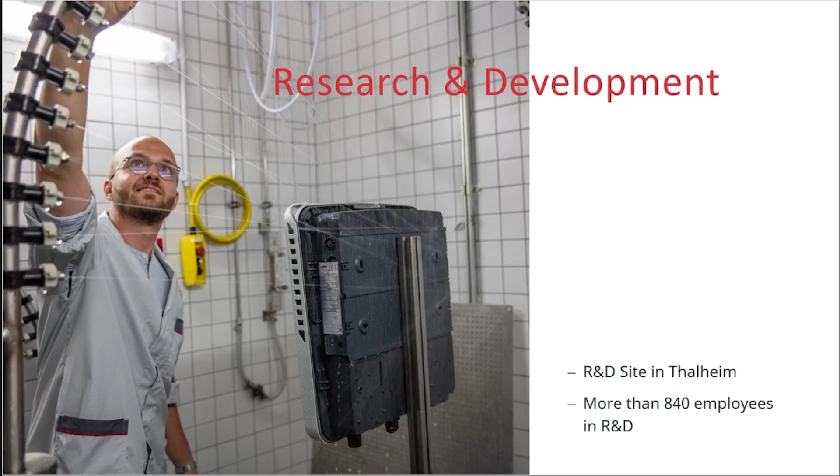Manufacturing is also in Sattledt, all villages near Wels, maybe 10 kilometers away. Pettenbach also makes torches, that was the start from Günter Fronius at the old location, which is still working now. Then there was rebuilding in Sattledt and Wels, and Sattledt is the manufacturing site, with final assembly in Sattledt, and welding torches in Pettenbach.

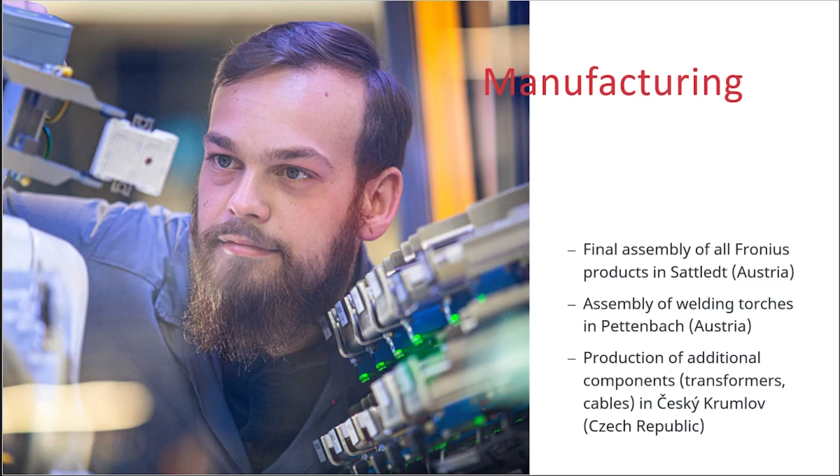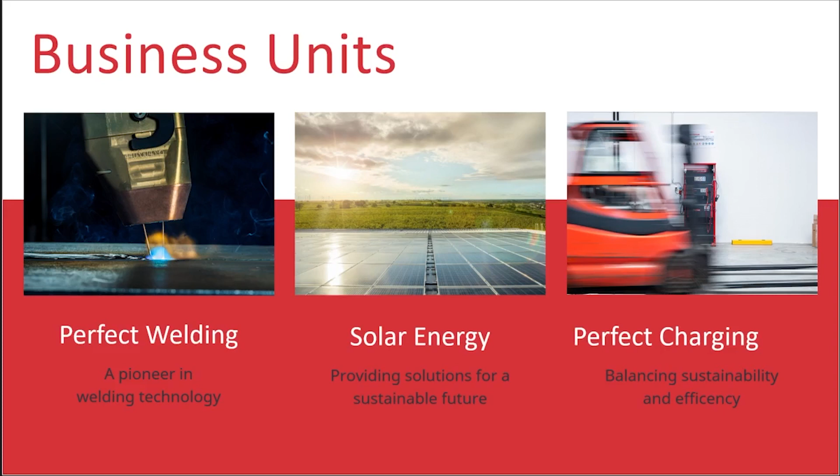And the production of transformers and cables is in Czech Republic. We have 3 business units: perfect welding, solar energy, and perfect charging. We're a pioneer in perfect welding and solar, providing solutions for a sustainable future, and charging balances sustainability and efficiency.

Perfect charging, founded in Pettenbach in 1945, providing smart and best-in TCO, total cost of ownership.

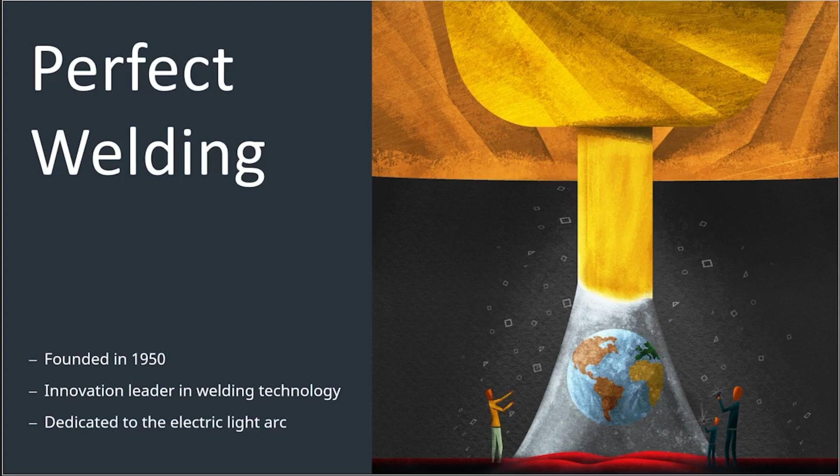Perfect welding, founded in 1950, innovation leader in welding technology. Solar energy, founded in 1992, making 24 hours of sun, really.

Fronius' mission is also about the people, the planet, and the profit.

For the perfect welding unit, we have a short video, this is the newest one. This video shows some parts of what we are welding for customers, including automotive customers.

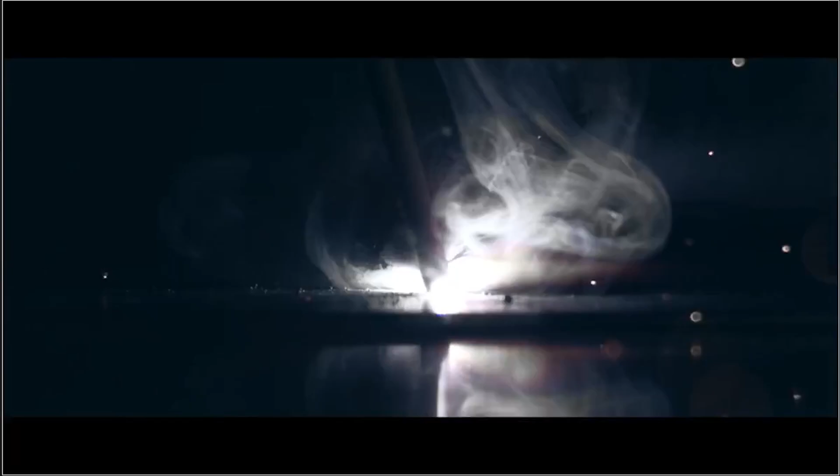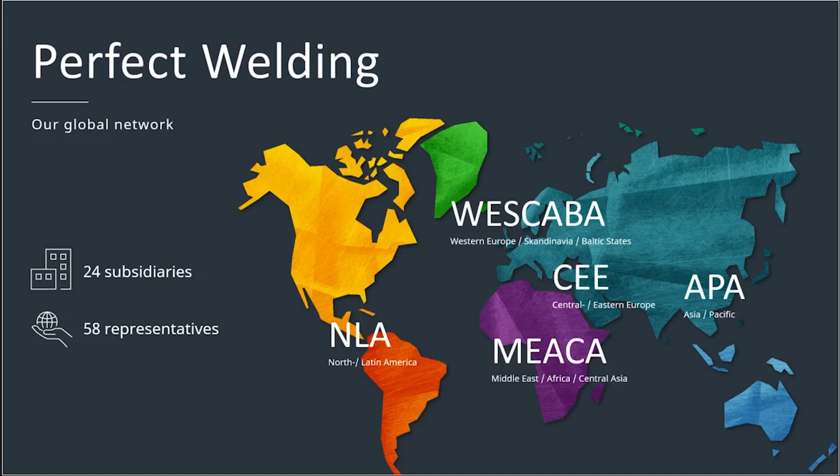Then we have our global network. We have 24 subsidiaries, 58 representatives, across North and Latin America, the Middle East, Western Europe, Eastern Europe, and on the Pacific side, the Asian side. WESCABA, Western Europe, Scandinavia, Baltic states.

We have almost 7 subsidiaries, 11 representatives, and 261 employees there. CEE, Central and Eastern Europe, has 4 subsidiaries, 12 representatives, and 123 employees.

North and Latin America, you see Canada, USA, Mexico, Brazil, Argentina. That's 5 subsidiaries, 8 representatives, and 201 employees.

Asia Pacific: 6 countries including Japan, Hong Kong, Vietnam, Thailand, China, India, with subsidiaries, 11 representatives and 245 employees. Middle East, Africa, Central Asia: 2 countries, Turkey and South Africa, with 16 representatives and 37 employees.

1998 brought the digital revolution with TransPuls Synergic, fully digital controlled. 2001 saw laser hybrid, which is also a high performance welding process. 2004 introduced the CMT process, the dynamic cold metal transfer welding process. Then in 2013, TPS/i, the intelligent system - moving from digital to intelligent, that's what the 'i' stands for.

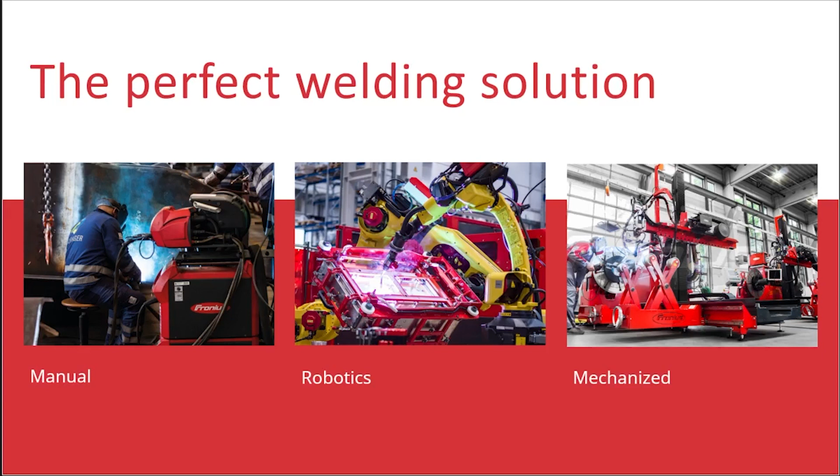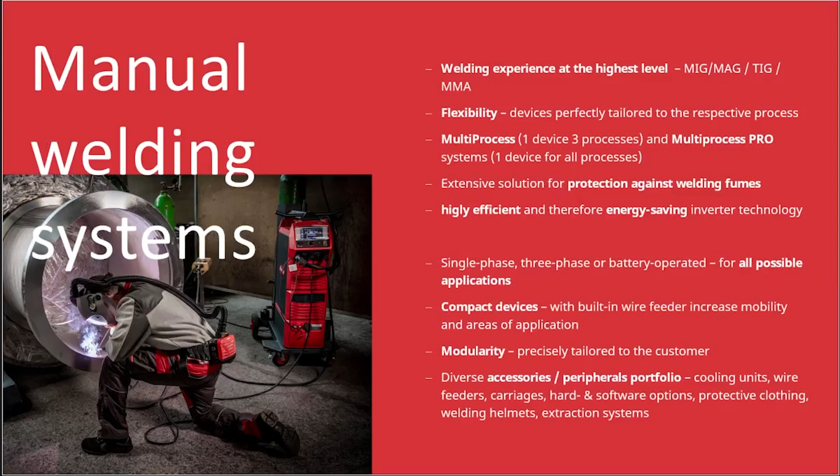With our welding solutions we have manual, robotic and mechanized options, covering MIG-MAG standard pulse CMT, MMA, TIG and TIG plasma. For manual welding systems, we offer experience at the highest level across MIG-MAG, TIG and MMA, with full flexibility.

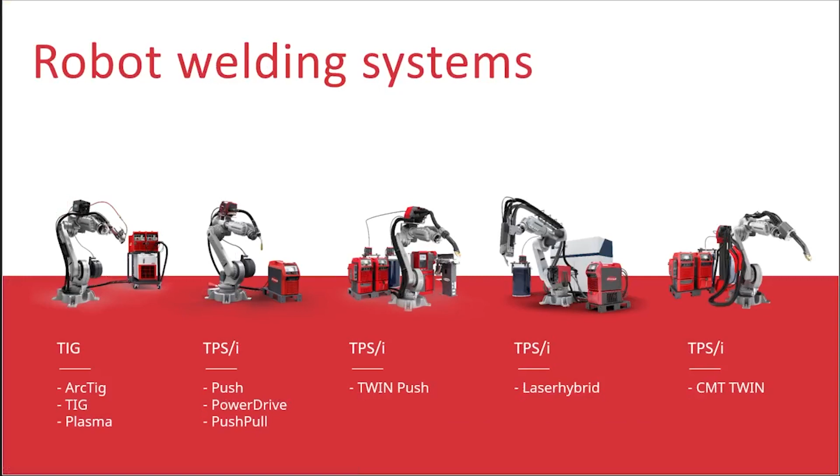On the robot side we have TIG and TPS/i, with different TIG processes like ArcTig and plasma. For TPS/i we have push, power drive and push-pull for the robotic side. We also offer high performance welding with TPS/i twin push, TPS/i laser hybrid, and CMT twin.

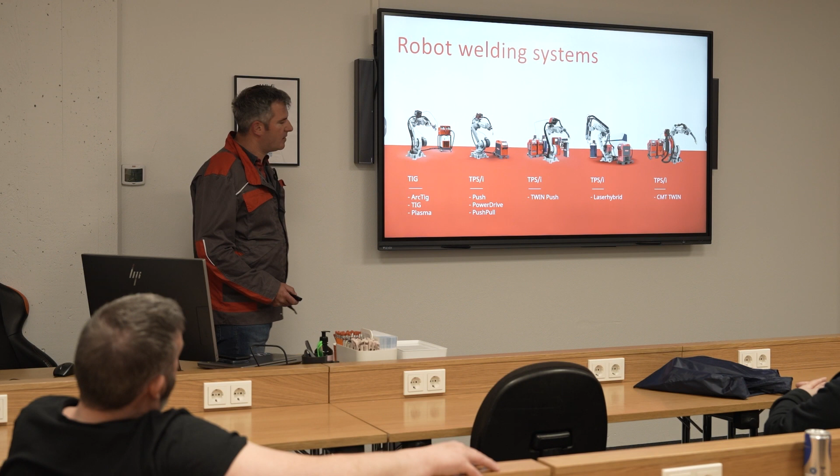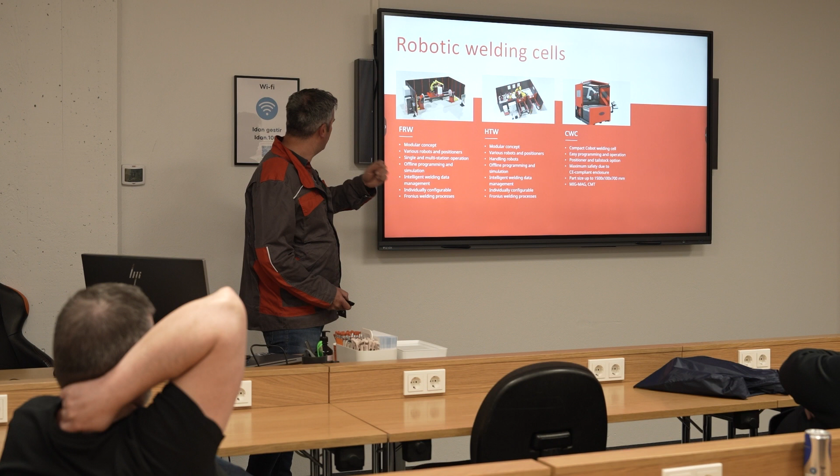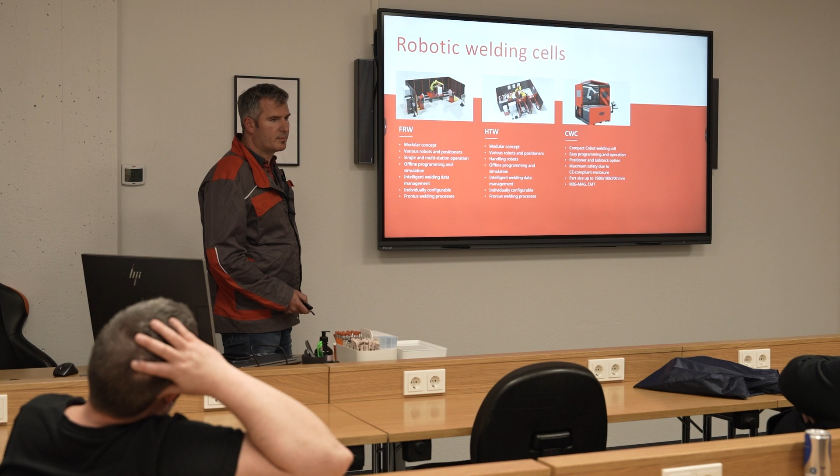We also have automation, the FRW system, complete material handling for welding with handling robots or compact cobot cells. And hard automation including circular welders or seam welders, clamping and bench systems, or circular welding.

Cladding is also possible - we have different cladding systems, including SpeedClad which preheats the wire, allowing you to bring more wire into the process on the cladding side.

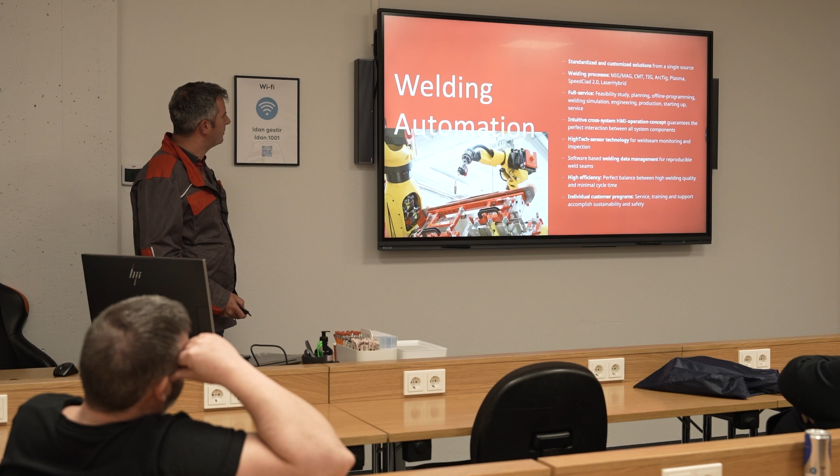Products from the automation side include orbital, carriage, and some components. The target segments for automation include general industry, yellow goods, and automotive, which we also see in the video.

Customer tailored services are also important, for the right data management, WPS, welding training for the future, and also WeldCube software solutions with data interfaces.

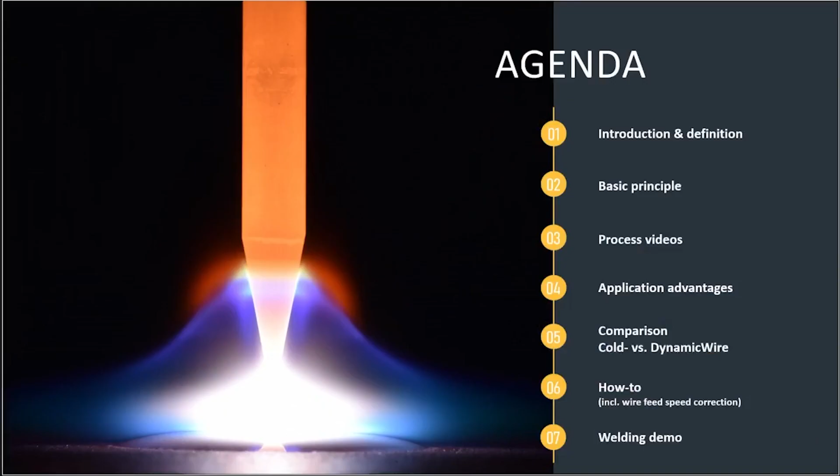The introduction and definition of TIG DynamicWire is based on active control of the wire feed. The actively interacting wire control expands the parameter window and simplifies handling. The wire feed speed is automatically adjusted to the amperage, arc length and seam type.

TIG DynamicWire works in synergic modes. We have all synergic characteristics possible for different materials, also aluminium, nickel base, and steel - that's all synergic modes.

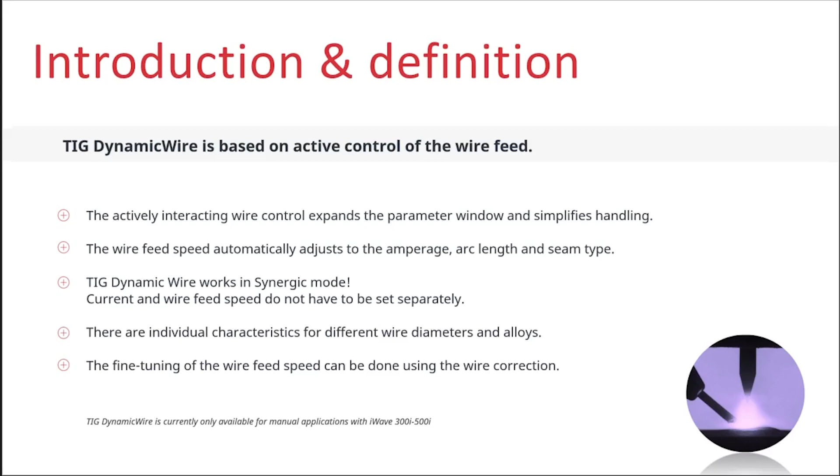There are individual characteristics for different wire diameters and alloys, and fine-tuning of the wire feed speed can be used - we see this on the wire correction parameter, which ranges from -10 to +10. It's the only parameter you need to use.

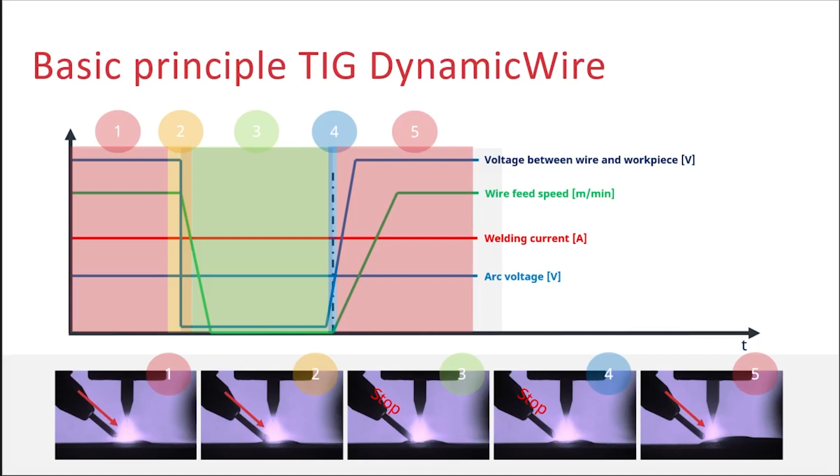Synergic lines, what we have: aluminium, magnesium, aluminium silicium, stainless steel, steel and titanium. And when some customer needs a specialist characteristic, then we made it for the customers.

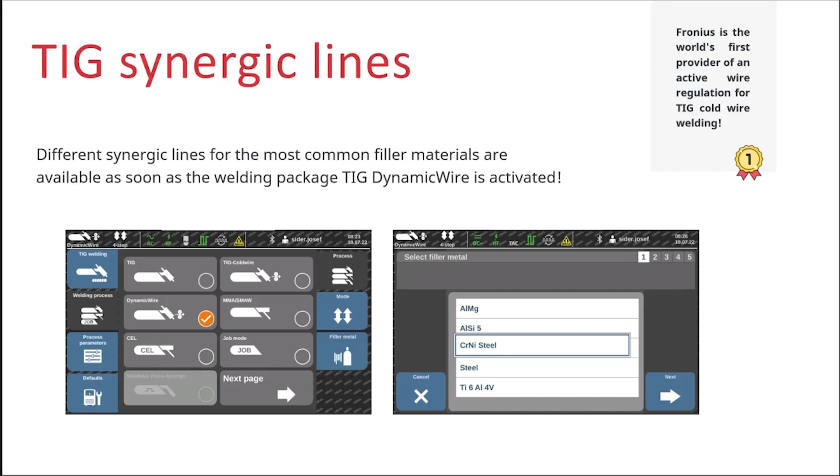Only this button, DynamicWire, the process, use the process, and then use the filler material. It's a picture of how it works. Wire comes, contact, stopping, and waiting to burn. And always feeding, stopping, feeding, stopping.

It's also possible with TIG DynamicWire pulse. And the wire correction is -5 to 0 and to +5. We see it here on the seam, we have here -5, that's meaning we became not so much wire, it's a little flatter. 0 is what we use for the synergic line, and on +5 we have more wire.

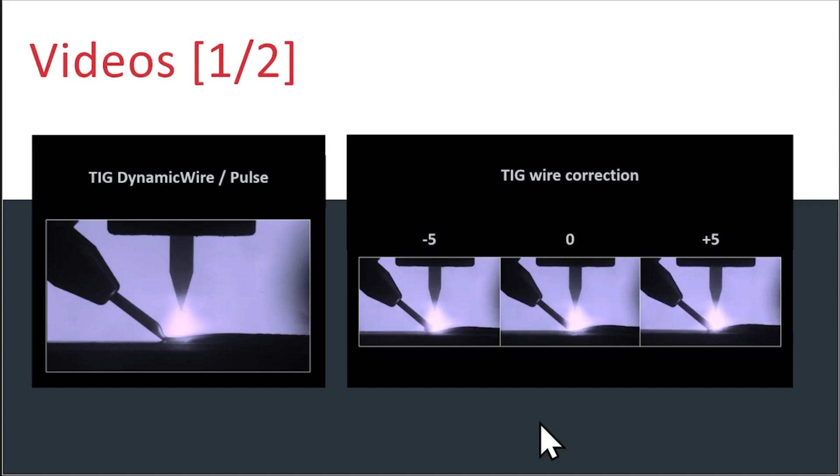On this we see the -5 is meaning less wire and 0 standard, and +5 is you get more wire. Maybe when you have the first pass for the root side, you use -5, and for the next layers, when you want more wire, then you give more wire. This we see, that's a sample, okay, 8 mm.

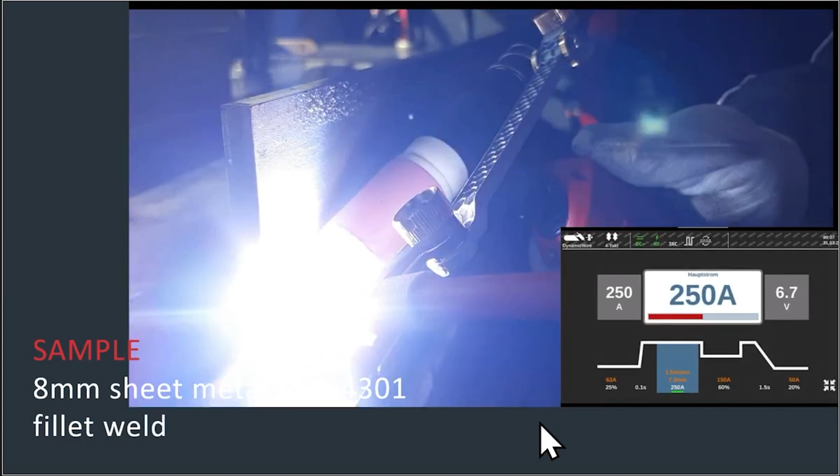Practical advantages from DynamicWire: improved wetting behavior. Excitation of the weld pool helps in case of component tolerances because the feeding regulates amount of filler material when the gap is changing or something. Application specific setups, you have some characteristics available, and it simplifies manual welding as tolerances and changes in arc length.

Wire and current no longer have to be set separately thanks to TIG synergic mode. You have not a lot of parameters, it's easier to handle. When you have some welders with less skills, then it's easier with DynamicWire.

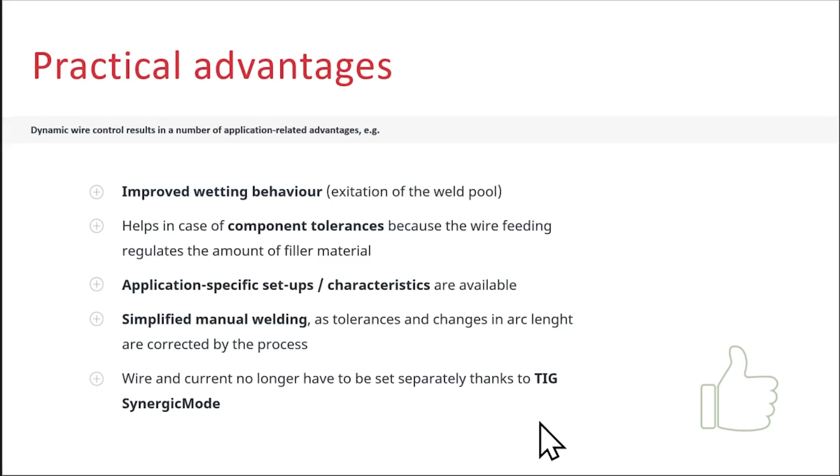Wire control and consequences, you see here some example. We have here beginning 0 gap and here with 4 mm gap. Beginning here, weaving off, and here with weaving on.

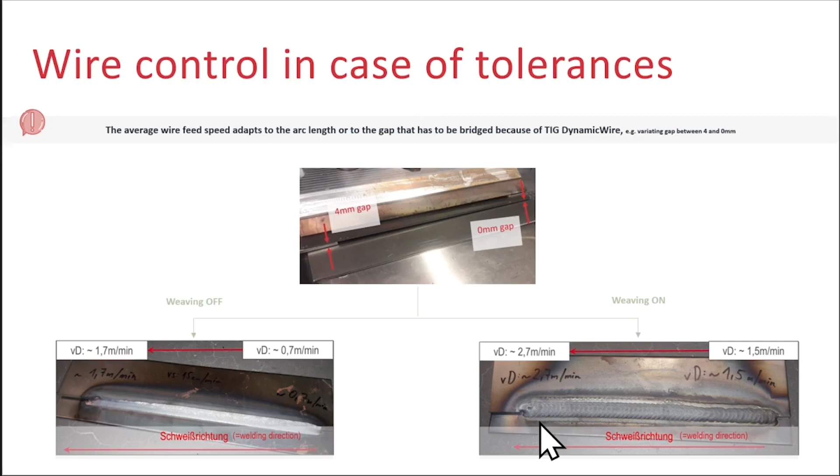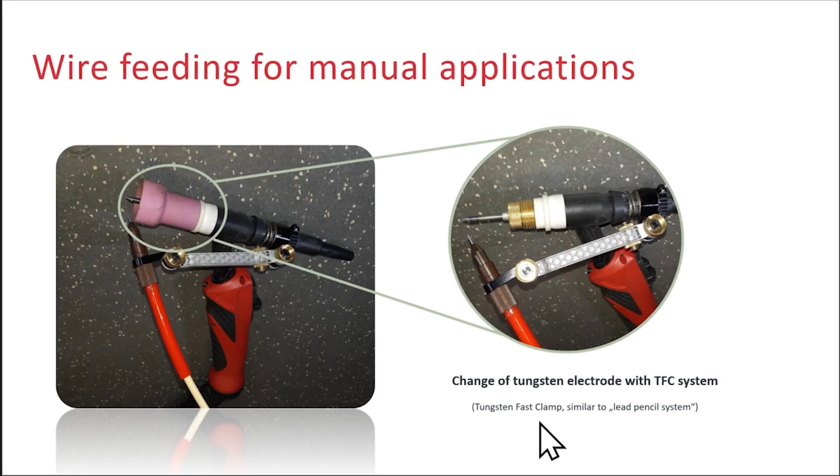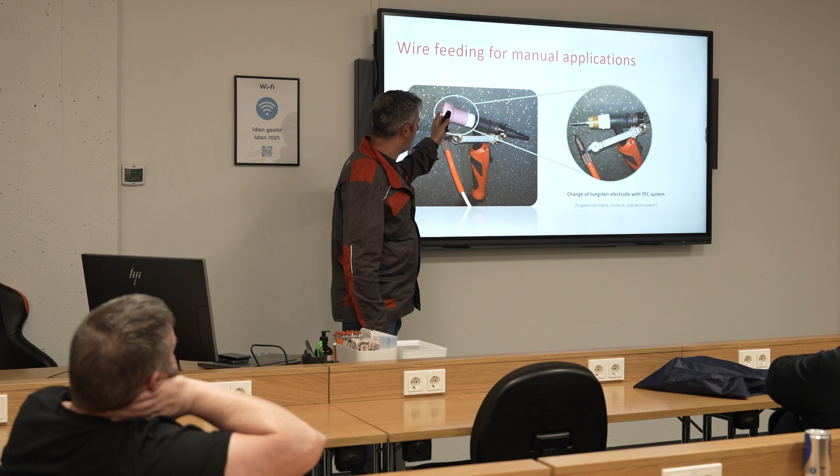Wire feeding for manual applications. Have here also what's new is the TFC system, the tungsten fast clamp. It's meaning a pen. When you push the button, you can change the electrode, you don't screw it. When you open this screw, push it back, you can push out the gas nozzle, and with the button on the back side, you can remove the electrode.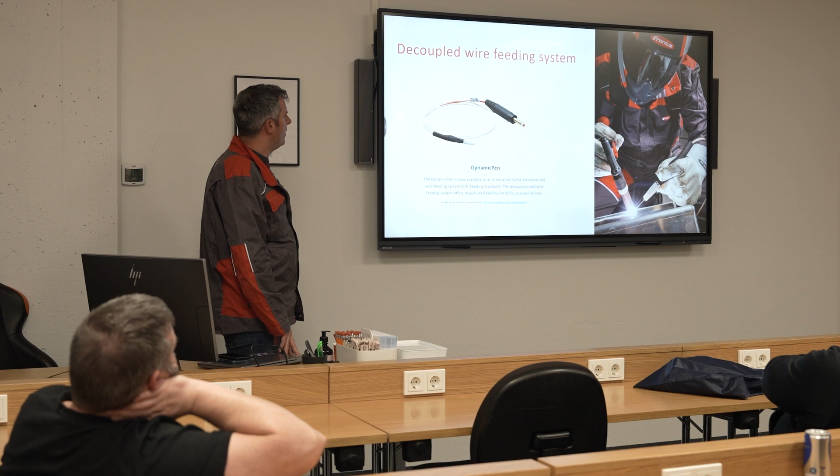Also we have the TIG dynamic pen for difficult applications or for pipe welding. When you have no rotation table or something where it's easy to handle for some applications, we recommend the dynamic pen. It's also available.

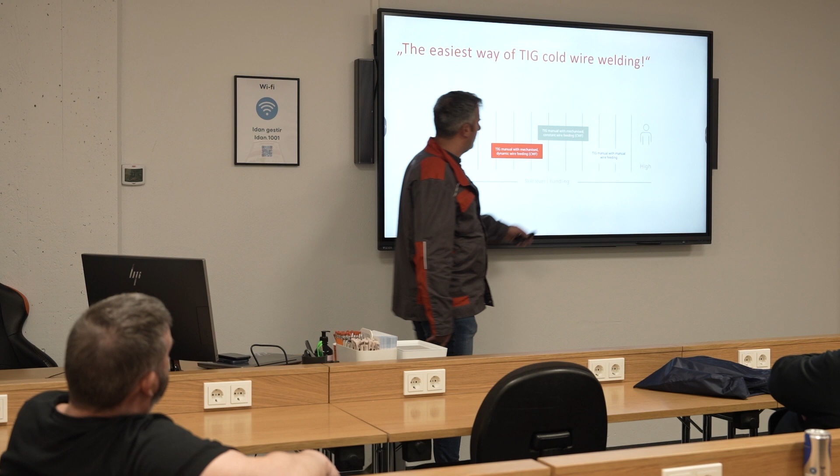We made also some tests with TIG cold wire and DynamicWire. That is meaning, okay, TIG manual with mechanized DynamicWire, you need less skills. Normal TIG welding, the highest skills in the middle, and the lowest skills with DynamicWire.

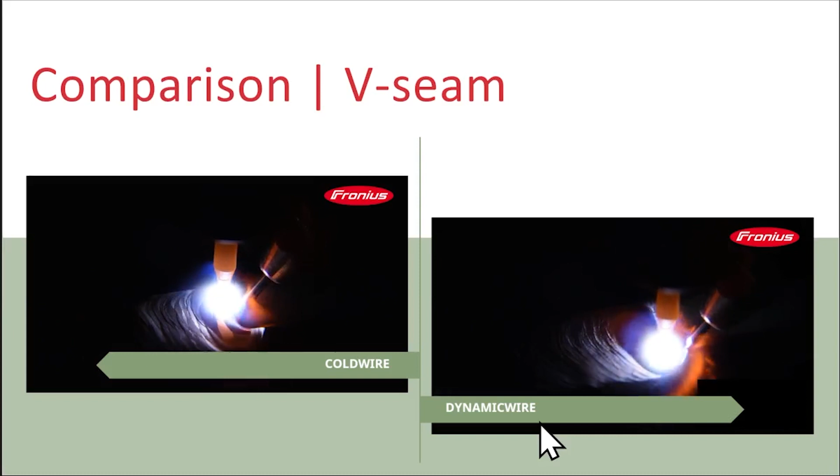Comparison with the V-seam from the cold wire side versus DynamicWire. When you look at this picture, you see exactly, okay, the wire feed is always feeding constant, and then you have too much wire inside in the gap. It's always feeding. On the DynamicWire side, it's always stopping. When you have the contact, it's stopping.

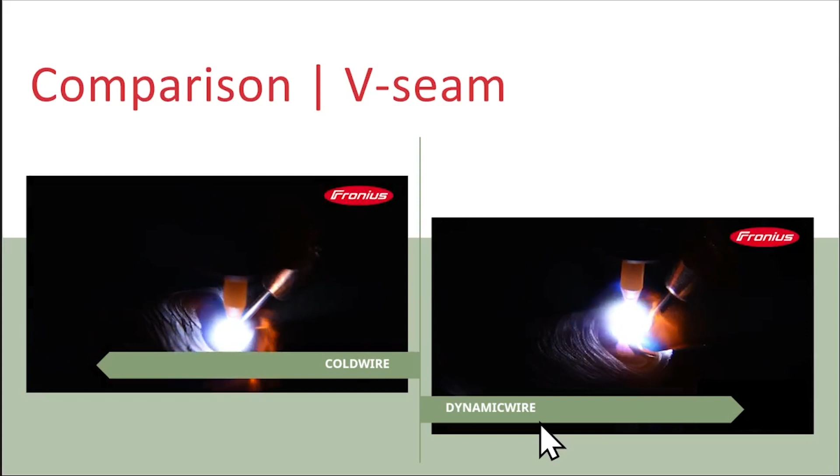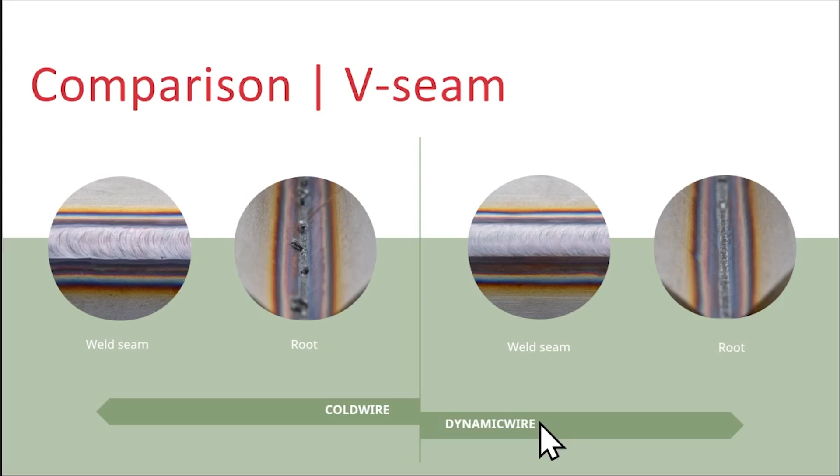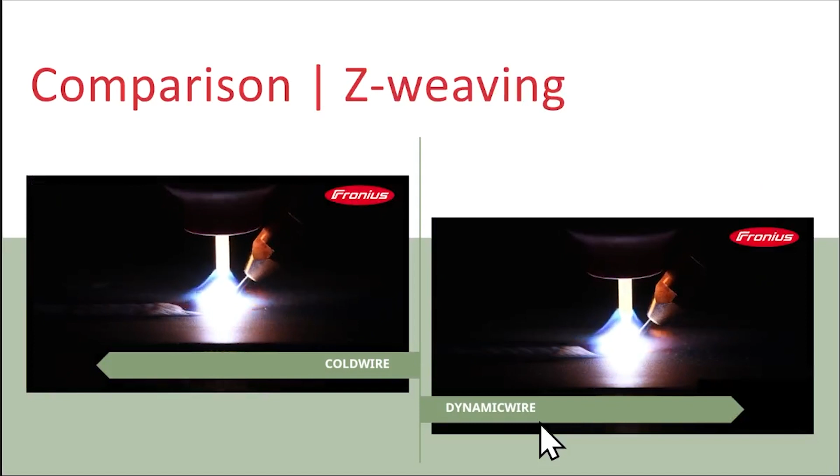On the root side, you see it on the back side, you have some material too much. That's the comparison. Also on the weaving, on the cold wire side, you see it's always changing the contact tip. On the DynamicWire side is really...

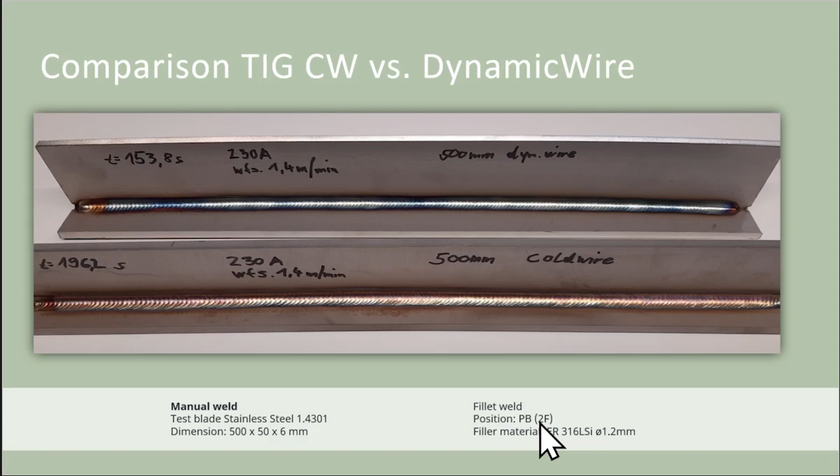Also welding a plate. DynamicWire vs cold wire, and we have 153 seconds on the DynamicWire and maybe near 200 seconds on the cold wire side.

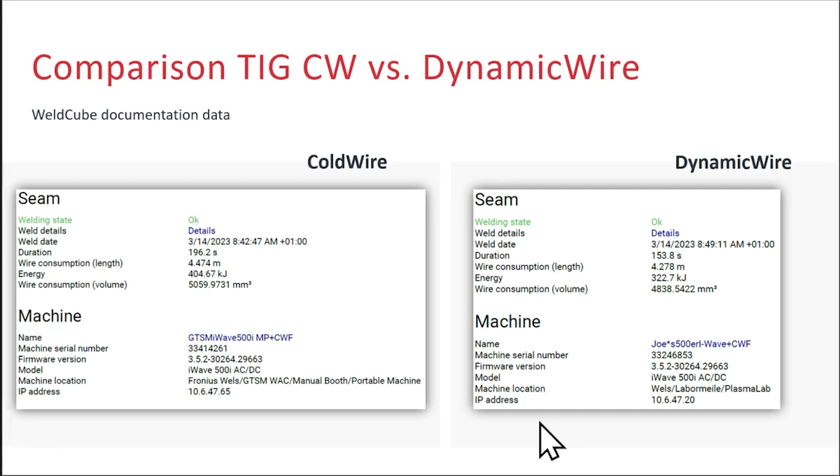That's from the WeldCube data management. We see here cold wire energy, put also more energy inside. And the time: 196 and 153 on the DynamicWire. It's possible to weld faster and with less energy.

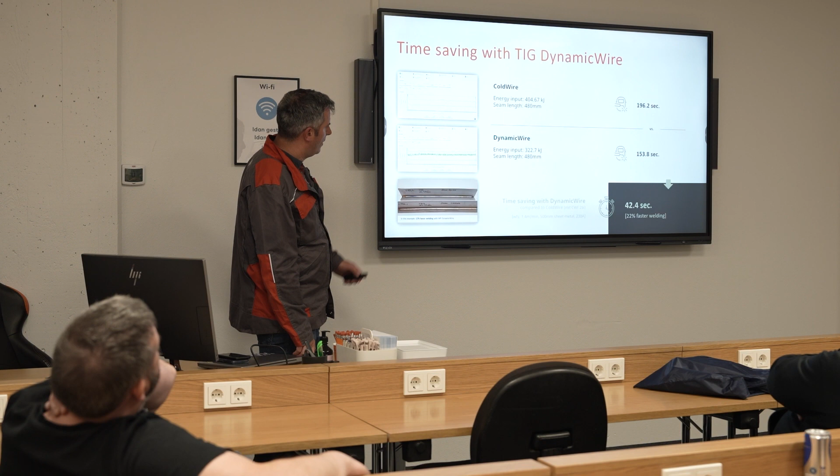42 seconds faster welding possible.

Always important is when you start DynamicWire and made the R/L alignment, the power source must know. We have this function inside. When you have a longer hosepack, or when you have the ground cable, or the ground situation is not always the same, then it's important you made the R/L alignment. Then the power source knows how much voltage you need.

That's easy to explain. Process, DynamicWire, change material, whatever you want to use, and then diameter, gas, and save it. And then you can start.

That's here some different parameters. Wire feed setting, DynamicWire.

Important parameters are the TIG wire correction, what we see, go to minus or go to plus, then you have more or less wire. The wire start delay: you have the contact, then the arc is burning, and then 0.2 seconds is waiting, and then comes the wire.

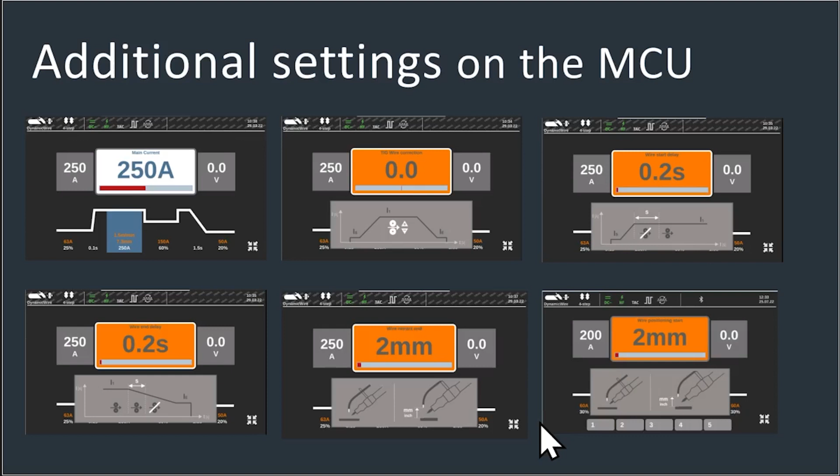On the end delay you have also here, on this ramp to the second, so to delay 2, you have also 0.2 seconds. You can also use how many millimeters you want to back on the end and also on the start.

Recommended wire distance, what we say, from this current side, that's the distance to the tungsten electrode. Universal setting, 2 millimeters.

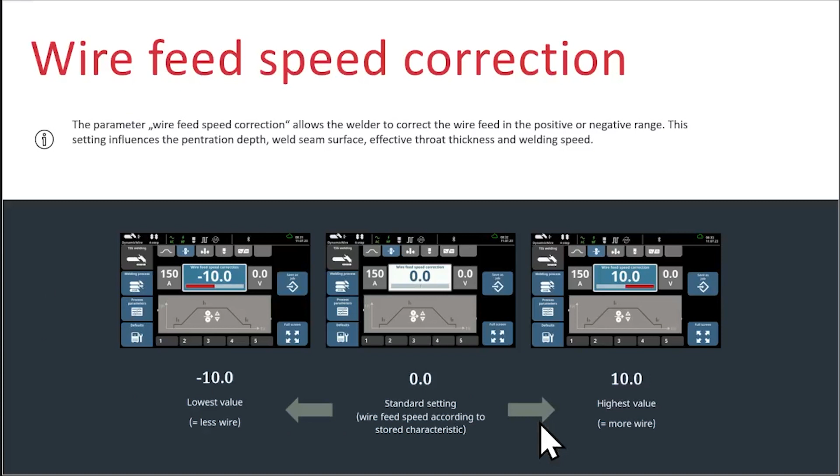Here we see the wire feed speed correction. That is also on the macro side, what we made some tests on. Wire feed speed correction to -10, you see here the penetration is more. And when you give more, then the wire is always cooling the welding seam, we know about it, and then you have less penetration.

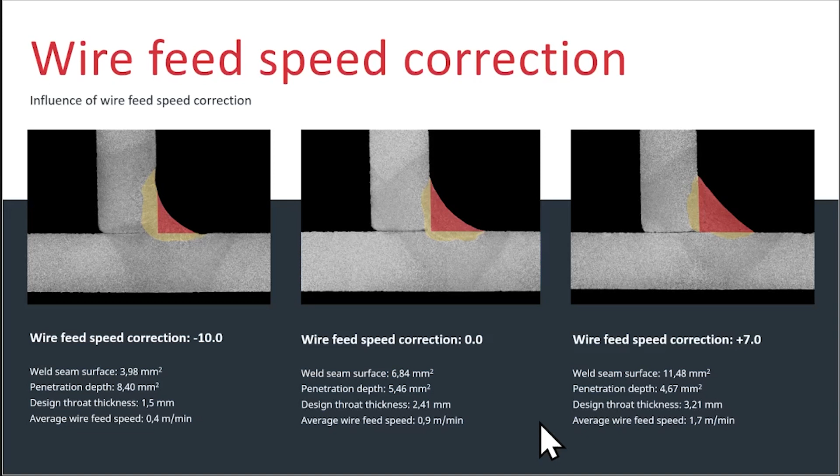That's the end of the presentation. Now normally we have demo. Okay, thank you guys.

Is this, you just plug this into the machine, it's almost like a MIG welder, but you're TIG welding? It's TIG welding, huh? Yeah, but it's the same principle as a MIG welder. You have a roll that's feeding the wire instead of you holding it. That's, if I understand it correctly.

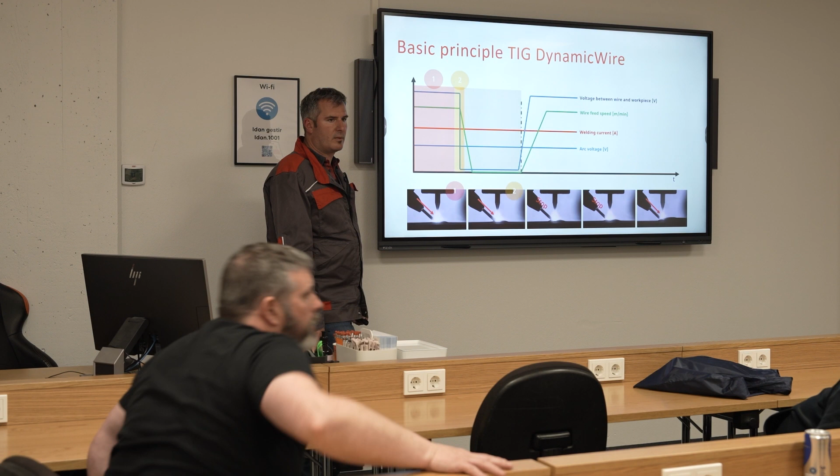What he is asking is if it's the same wire that we use for MIG-MAG welding. Yeah, it's the same wire. Do you use the same feeder? No, it's different, it's not the same feeder because of the speed of the wire.

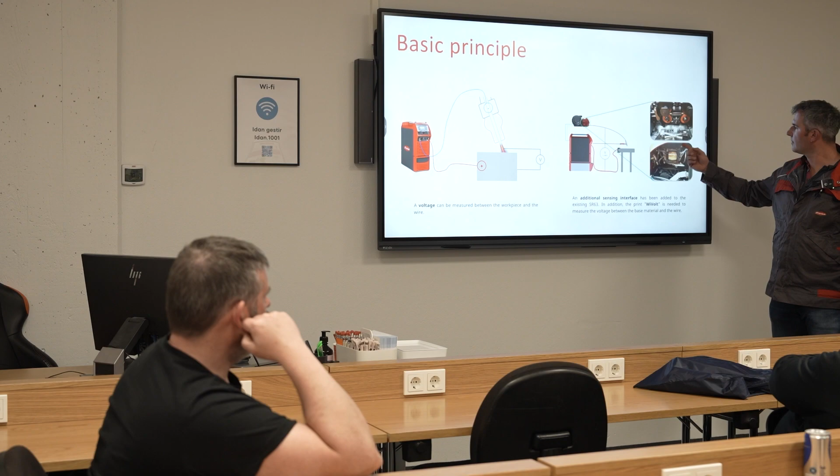And we have here also, you see, it's also a cold wire feeder. That's the principle of how it's working. It's a measurement from the voltage, and we have here a WiVolt print inside the wire feeder. That's the measurement, and here is the point to measure the voltage of the wire. That's the point of the DynamicWire. That's why you have to calibrate the machine.

It's always important to make the R/L alignment. When you have 2 meters longer hosepack or other situation from the weld, from the ground cable, then you have different values from the ground side. And then it's feeding more or less, then it's not working.

And then the machine thinks for you, it sees I'm not getting enough wire, and then it pushes more. And if it's getting too much, then it's not really working well. The machine is measuring the voltage all the time, and according to the voltage it's adjusting. And the voltage measurement is working with this, yeah?

With these prints, this is how it's working. The measurement point is always here, the voltage between the workpiece and the wire. And when you have made the alignment once before you start, then you always have the same values.